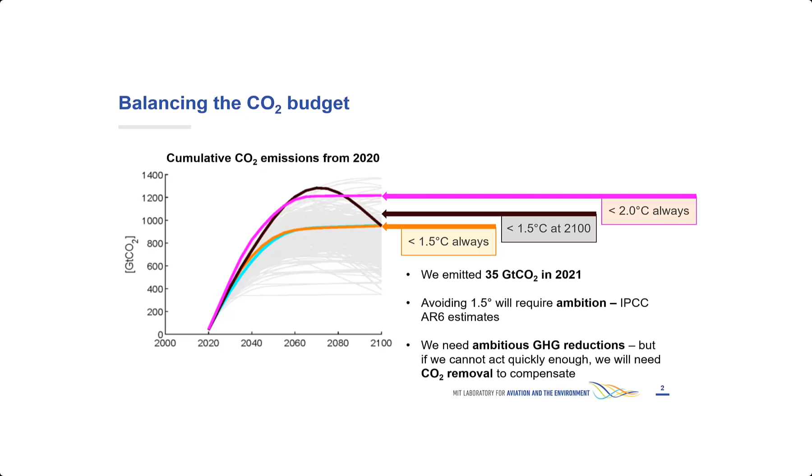And you can see there, an orange line to stay less than 1.5 degrees. It's an aggressive reduction target. You can see there a total plateau by 2060. You can see if we don't achieve that and continue to emit, you can see a line there for staying below 2 degrees. But if we sort of fail to meet the trajectory for the orange line, but still want to maintain 1.5 degrees, you can see another line there, the black line, which implies negative emissions in the latter part of the century. So one of the use cases of direct air capture is not destroying the planet and keeping us at some temperature threshold.

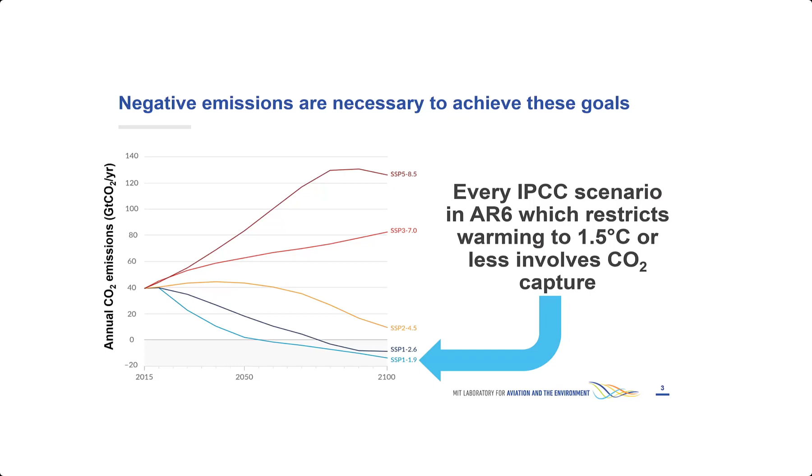Indeed, if you look at the IPCC AR6 scenarios, all the scenarios that keep us below 1.5 degrees involve CO2 capture in some sense, and those are the ones shown in the bottom there. So it really does seem that direct air capture or other negative emissions technologies are central to the future of a sustainable planet at the levels agreed by the global scientific community of 1.5 degrees or less. So that suggests that this is a profoundly important thing we need to work out.

Well, what is direct air capture? Well, I'll leave it to the two domain experts to describe in more detail in subsequent talks. But the idea is we take a stream of air from the atmosphere, treat it in some way which will be discussed, such that the stream of air going back to the atmosphere has less CO2 in it, and the CO2 has been removed, and then something is done with that, and that's the question, what's done with it?

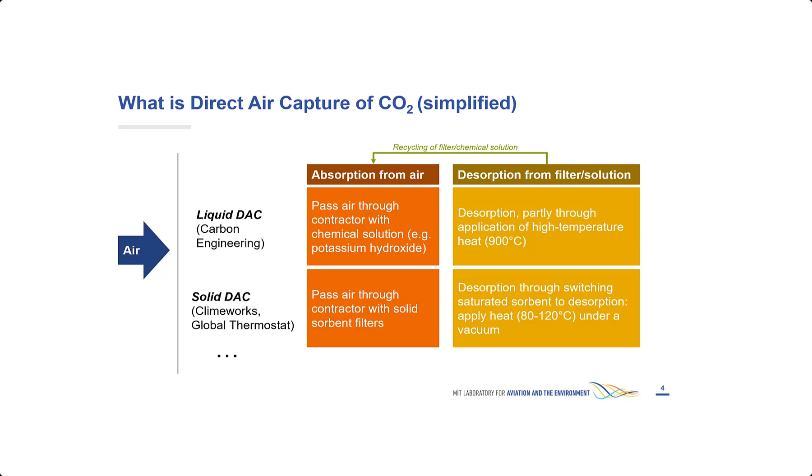So there are two things you could choose to do with that stream of CO2 that you remove from the atmosphere. First, as I alluded to earlier, treat it as a negative emissions technology. In other words, take the CO2 from the atmosphere through direct air capture and put it into long-term storage. An alternative to that, which I'll come back to as to why that is important, particularly when you're in an aerospace engineering department, and it's important to me, is direct air capture as a source of non-fossil carbon for future fuels. So let's start with the first case then, direct air capture and carbon capture and storage as a negative emissions technology.

Well, in order to evaluate what makes this cost competitive or cost effective, we need to look at the competing technologies and the counterfactual. So, what else could you do for negative emissions? And what if you just did nothing and accepted the cost? So let's take the first comparison point, the social cost of carbon. This is the damage to the world done by each ton of CO2 that is emitted. And there's a wide range of estimates of that. As you'd imagine, it's a hard thing to work out. This estimate here comes from a model from my group here in the department, led by Florian Allroggen, and Carla Grobler has done a lot of work on this. But it's consistent with the spread of literature results that are out there and draws on the overall literature to be a consensus estimate.

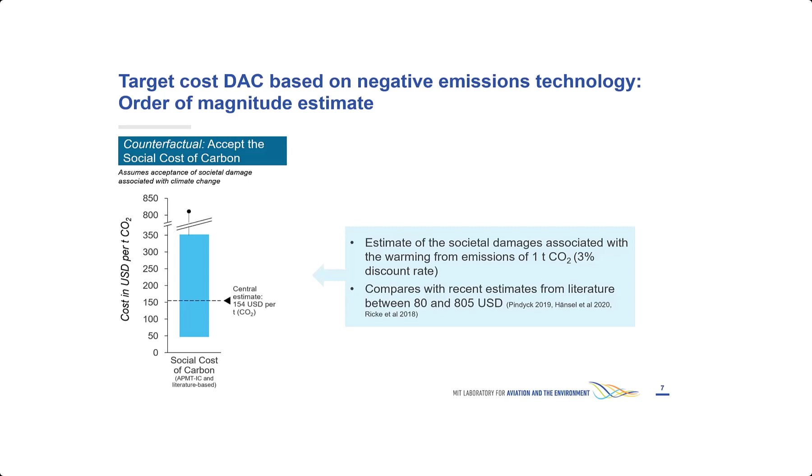So this gives an estimate that a ton of CO2 today causes around $150 of damage to the global economy and environment. Now you can see there a big range. That blue bar is sort of the main uncertainty range. Lots of uncertainties, very hard to estimate. These numbers will never get perfect, so to some extent we just have to live with them, and they'll give us some sense that clearly we should spend more than $10 to abate a ton of CO2, but we probably shouldn't spend more than $1,000 at this point because there'd be better ways to use that, even environmentally. So $150, maybe up to $800. Numbers like 350, if you look out a few decades ahead, give you a sense of how much money you should spend to take a ton of CO2 out of the atmosphere and store it.

Another thing you could do there is compare it to the competition. So the competition, perhaps in the nearer term, to direct air capture would be BECCS. So this is bioenergy with carbon capture and storage. The idea here is that you grow some biomass, switchgrass or some crops, or there's large debate as to what you might use. Through growing the biomass, carbon dioxide is taken out of the air through photosynthesis. It becomes part of the biomass. You then burn the biomass. In so burning it, you generate heat. You use the heat to generate electricity.

Now I should say BECCS does have some fundamental limits that direct air capture probably doesn't have. So even if BECCS is optimal in some sense nearer term, you probably would still end up looking to direct air capture beyond that.

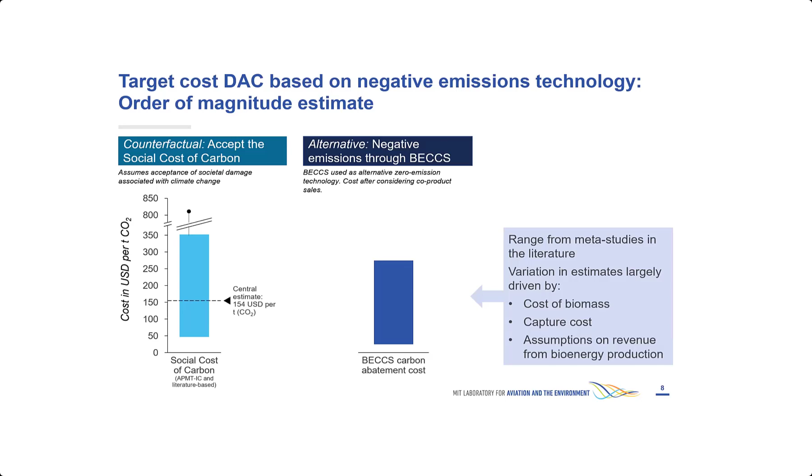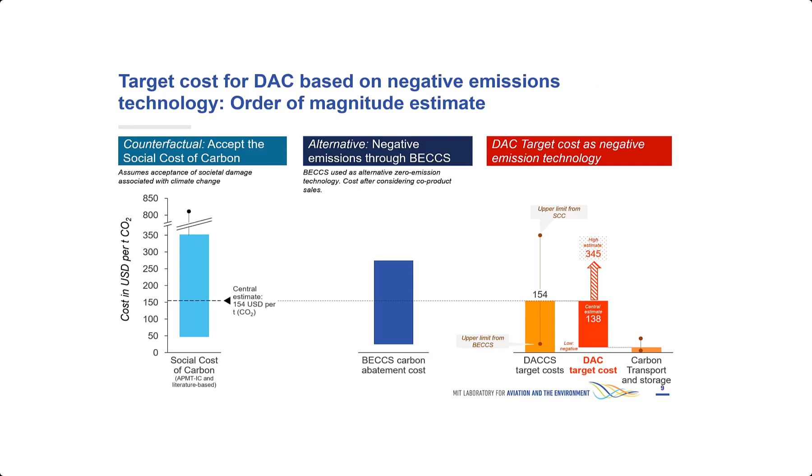So just to make that more concrete, what does that end up as the direct air capture cost? Well, taking the average of the social cost of carbon, you end up at about $138 when you take out the cost of carbon transport and storage. So that just gives you a point number. Again, lots of uncertainty. If it's $350, that still would be useful, but it shouldn't be $1,000.

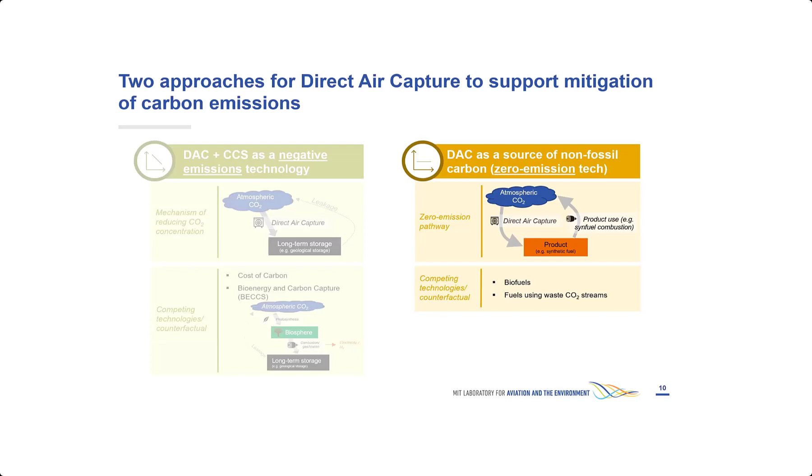So the second use then is not direct air capture as a negative emissions technology, but direct air capture as a source of carbon. So why would that make sense? Well, some of us noticed we're in an aerospace engineering department. No digs intended, of course.

Now, going from that bioenergy potential to jet fuel, you lose a factor of 2 in the conversion efficiency. So let's say we take the number 50 for sake of argument, divide that by 2, then you're at 25. And so you can see that aviation alone, let alone all of the other uses of biomass and bioenergy in mid-century, has taken up the entire usable supply to create biofuels for aviation, which most people believe is the future, assuming you don't want to use fossil fuels in mid-century for aviation.

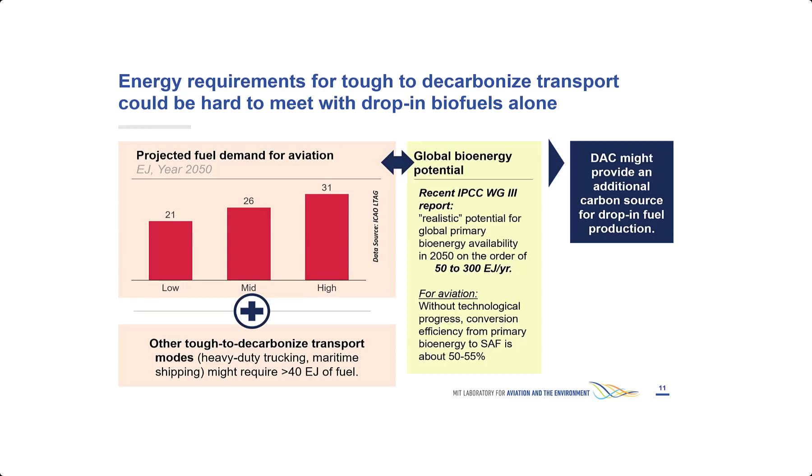So that suggests that at some point, and you could argue as to whether it's 2050 or 2070 or whatever it might be, aviation's demand outgrows the possible supply of biofuels for aviation. And so you need to either use synthetic fuels or hydrogen, essentially. And that's the big question.

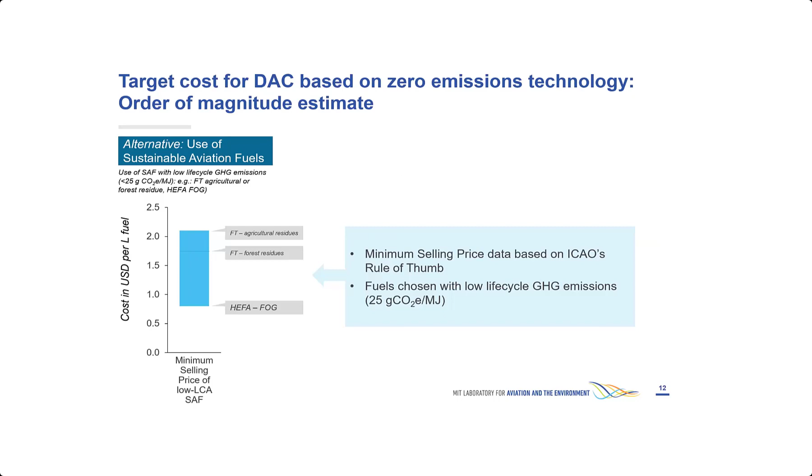So if we take sustainable aviation fuels made from biomass as the competitor for direct air capture, this is the range of prices of sustainable aviation fuels that are low carbon, $1–2 per liter. If we were to use electricity to both run direct air capture to get carbon out of the atmosphere, to make hydrogen, and then to combine that into a hydrocarbon synthetic fuel to put in the aircraft, then this is our estimated cost, about $2.1 per liter.

That then leaves you around $80 per ton for the direct air capture if it was cost competitive with the biofuels. So that does probably tell you that we should use the biofuels first, but at some point that will run out, and then we need direct air capture and power to liquid for the aircraft. Either that, or we reinvent the entire aerospace system to use hydrogen and deal with all the risks and challenges that entails.

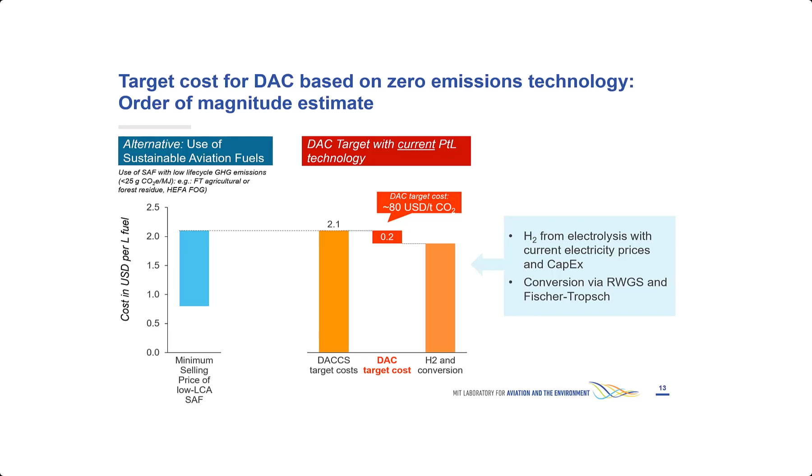So there are obviously many uncertainties in this. Another one could be, what if power to liquid technology advances significantly? Then you do end up with slightly better numbers. $110 per ton could be used for the direct air capture, and that looks a little better compared to estimates of the costs.

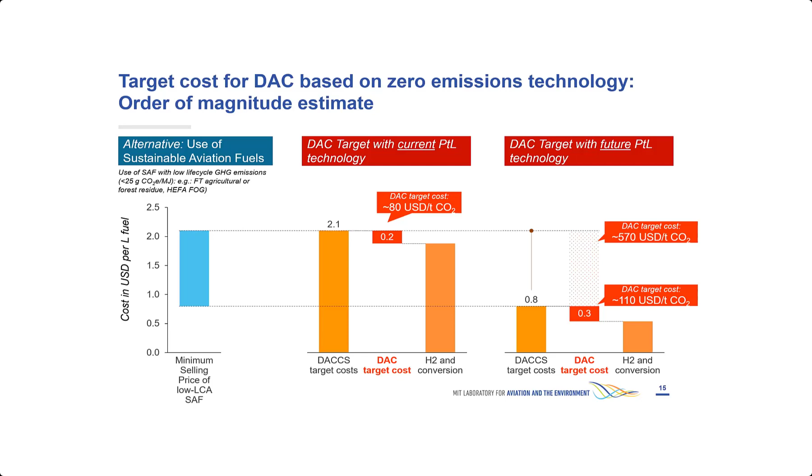So to summarize then, we need the innovators represented here to create for the world direct air capture that's $100 to $300 per ton of carbon. If it sustains at a high number, $500, $600, $700, it probably doesn't help the future of the world. But if it's numbers on the lower end, then we really have a viable solution to not only have a negative emissions technology that makes sense, but also potentially create a long-term future for hydrocarbon fueled aviation, not to say there isn't an alternative there.

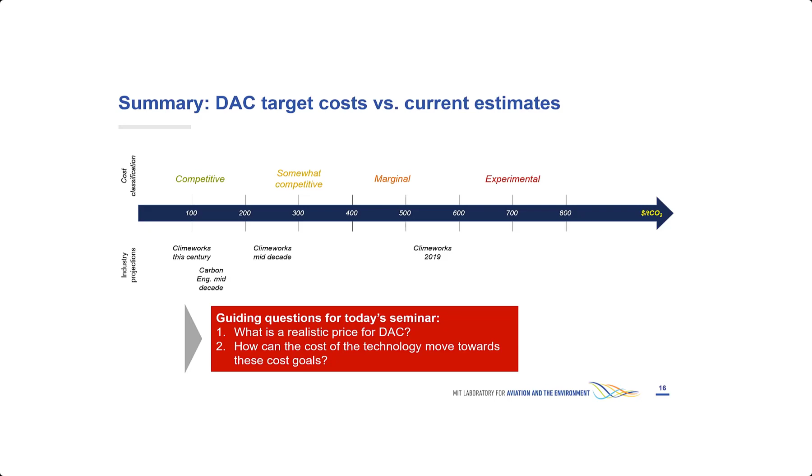I want to talk to you today about a process engineer's view of direct air capture. Before I came back to MIT 30 some odd years ago, I spent 10 years in industry, basically doing chemical process engineering.

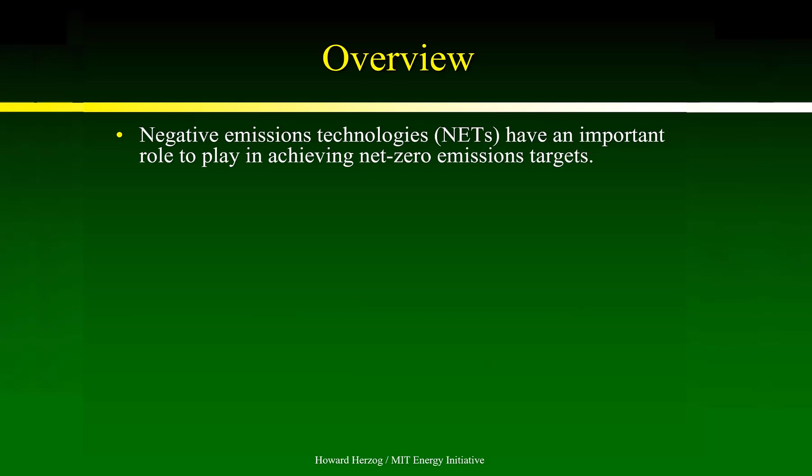So I'll use some of my skills to analyze this. First, let me say a few words about negative emissions in general. I think they have a very important role to play in achieving our net zero emissions target. But when it comes to going net negative, which a lot of people are talking about today, I think that's premature to talk about, and actually a very big distraction from where we are today.

I say that because in order for us to get to net negative, we first have to get to net zero. And so there's a lot of reasons we want these negative emissions to get to net zero without having to complicate it with this net negative. And decades from now, when we're approaching net zero, however many decades that is, we'll have much more information to make informed decisions about whether we continue on past net zero into net negative.

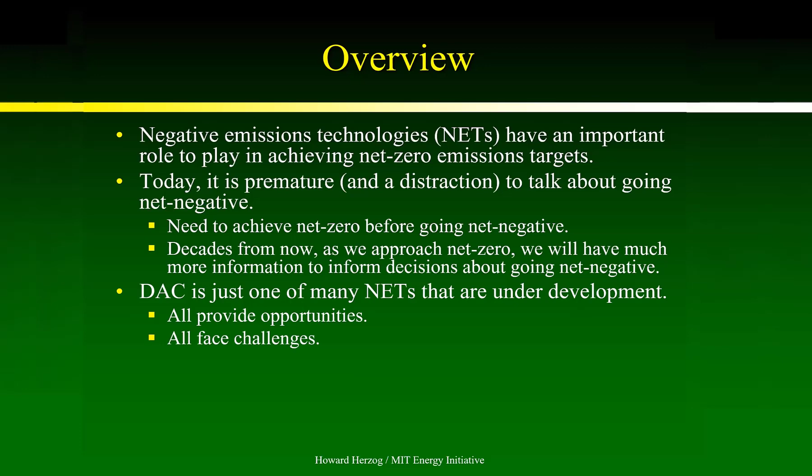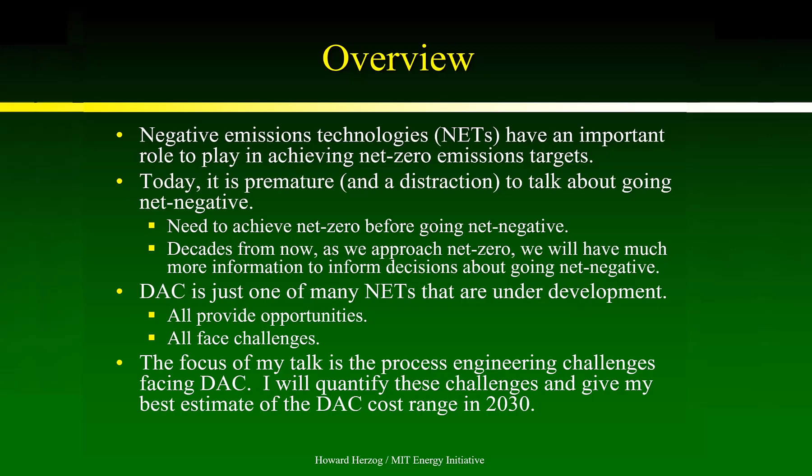As Steven said, direct air capture is just one of many negative emissions technologies that are under development. All these have opportunities, and all of them face challenges. The focus of my talk today is going to be the process engineering challenges faced by direct air capture. And in this talk, I'm going to quantify some of these challenges. And then since everybody's interested in numbers, I'm going to give my cost range for what I see for direct air capture in 2030.

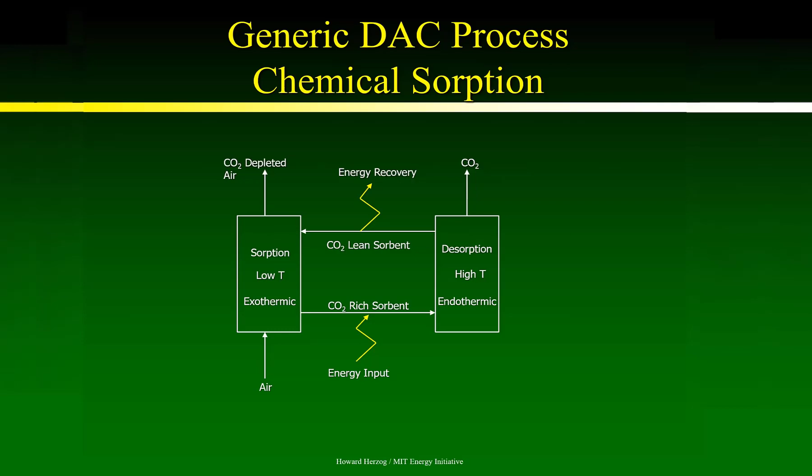So this is what a generic direct air capture process looks like. Basically, it's based on sorption and desorption. You have sorption at low temperatures, which is exothermic, and then at high temperatures you have desorption, which is endothermic, where you regenerate your solvent for reuse and then free up your CO2. You need energy input. You can have some energy recovery in here, and generically, this is how the systems work.

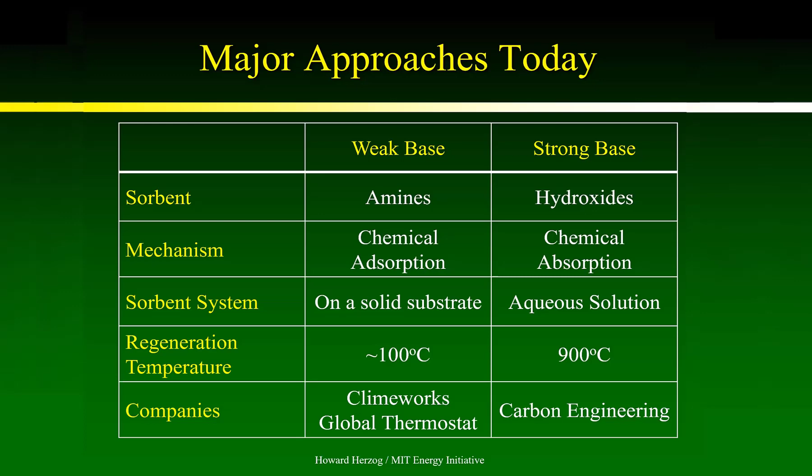Steven mentioned the systems. A lot of people are calling these solid systems and liquid systems. As someone working in the carbon capture business, I like to call it a weak base system and a strong base, being the characterization of the solvents, and the weak base systems use amines. For direct air capture, these amines are impregnated on a solid substrate, and it's an adsorption mechanism. For the strong base systems, you use hydroxides, and this is a chemical absorption system using an aqueous solution. You see a big difference in regeneration temperatures for these systems here.

So the leading processes for direct air capture, just like with regular carbon capture and storage, are based on sorption and desorption. There's one big difference that just drives everything, and that's the concentration of CO2 in the gaseous stream that you're trying to capture it from. In air, that's 0.04%, and that's about 300 times more dilute than you see in a coal gas flue, about 100 times more dilute than in a natural gas flue. And this has big consequences.

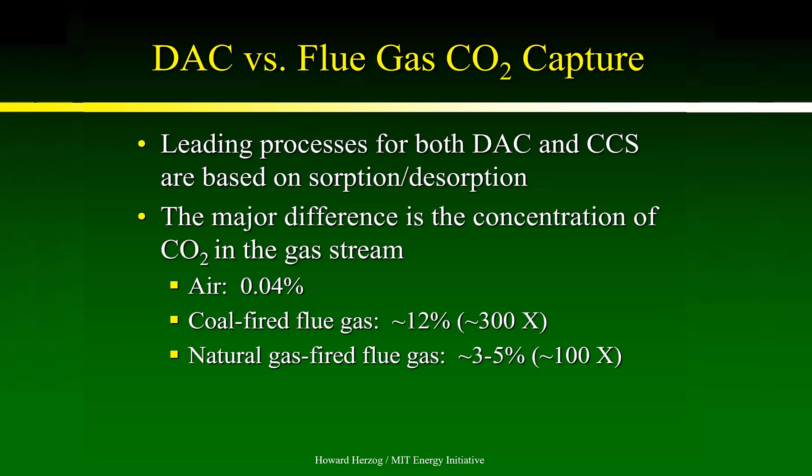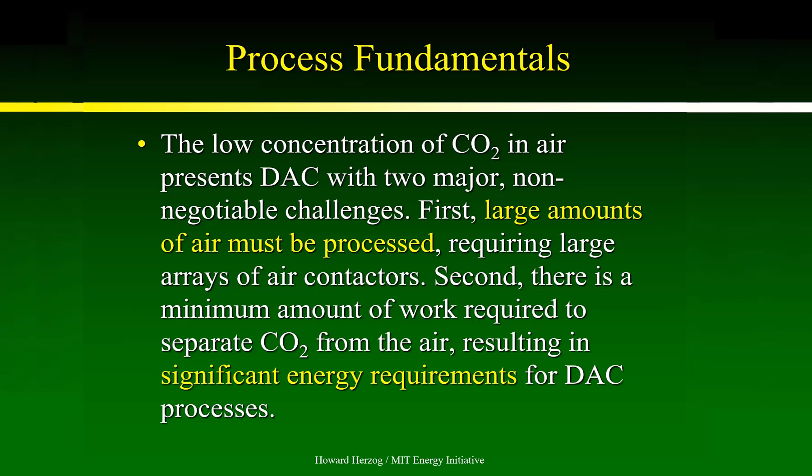Two of the major consequences we see are, first, you need large amounts of air to be processed if you're going to capture a ton of CO2. We can calculate that exactly, and in just a moment I will. Secondly, there's going to be a fairly significant work requirement. There's a minimum work requirement, and we're going to need multiple times the minimum work in real processes, and this leads to significant energy requirements. So once again, I'll quantify that. As I say in the first sentence here, these are two major, non-negotiable challenges. So let's take a look at air processing.

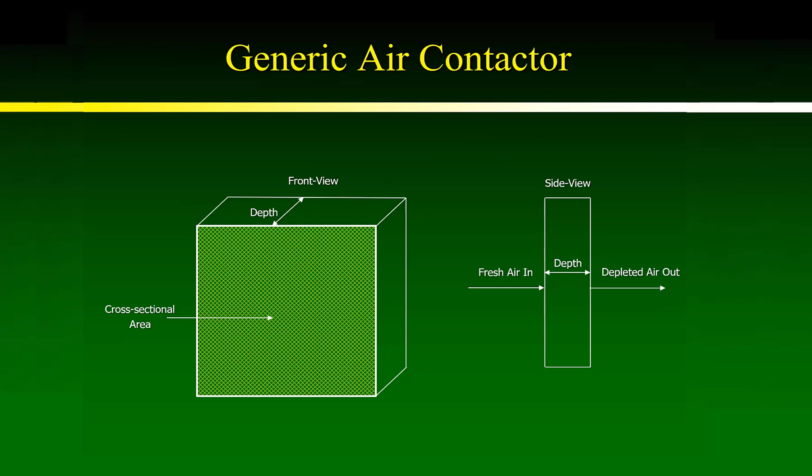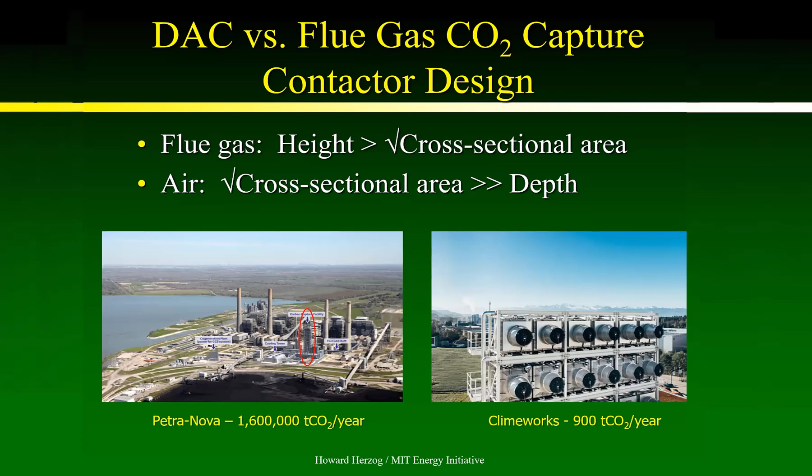We can quantify exactly what the cross-sectional area you need. In this example, we're taking the concentration of CO2 in the air as 410 ppm. We're going to capture 1 million tons of CO2 per year, and we'll assume the utilization rate of our capture plant is 90%.

You have two other variables: the linear velocity, which is how fast the air is flowing through the contactor. For absorbers in general, it's in the range of 1 to 5 meters per second. And you also need how much of the CO2 you capture from any given volume of air. I show it for several values, from 50% to 90%.

The carbon engineering design, which was discussed in the Joule journal from Carbon Engineering, had a linear velocity of 1.4 meters per second and a capture fraction of about 75%. That gives us a cross-sectional area of 46,000 square meters.

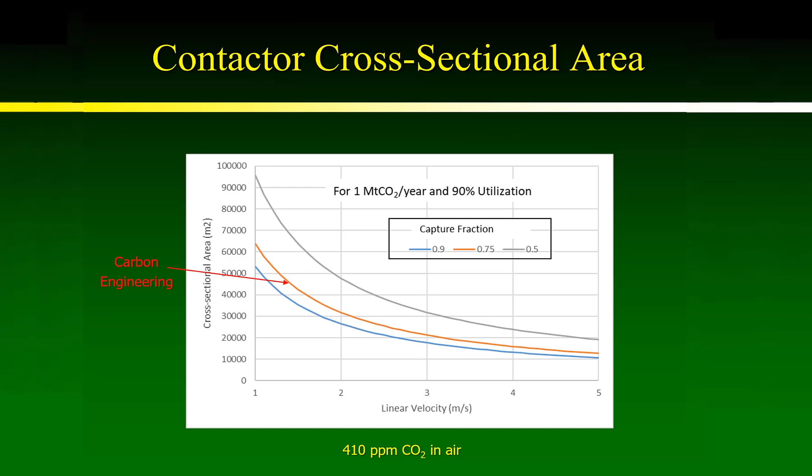Well, what's 46,000 square meters? Let's put that in perspective. It's basically, if you had a structure 10 meters tall, it would be almost 3 miles long. So 10 meters tall, about a 3-story building, 3 miles long. So this is very large.

You'll break it down and use multiple contactors. And one thing you have to do now is space the contactors. I say this is analogous to a wind farm. When you build windmills, you don't want it in the wind shadow of another windmill, so you have to space them out. Here, you don't want one contactor sucking in the depleted air from another one.

And you need to know this number to understand the land areas. Unfortunately, in the literature, I haven't seen any detailed study. You go into the literature and see lots of studies on wind, on how you do the spacing, but I haven't seen that at all for direct air capture. There was a National Academy study that gave a range of 1 to 7 kilometers squared for 1 million tons. But once again, I haven't seen anything based on what I'd say you need—some sort of atmospheric dispersion modeling to do that. Maybe David in the next talk may address this issue a little.

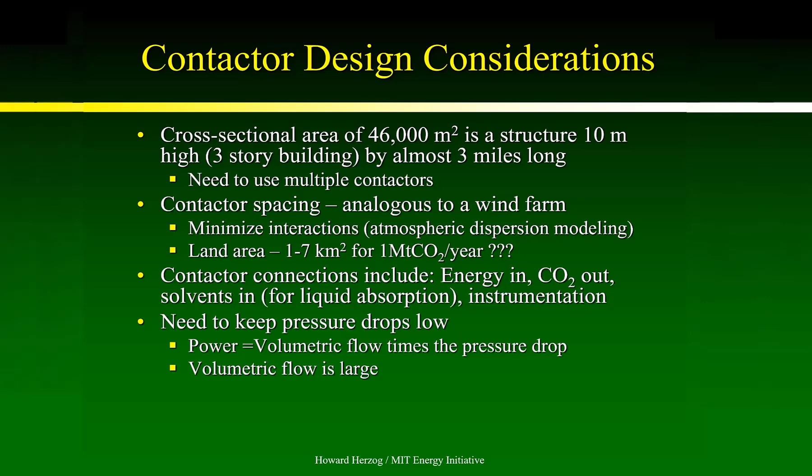You also need to connect these contactors. You need to put energy into them, and take CO2 out of them. For the liquid absorption systems, you need to put solvents in. You have to have instrumentation. And the other thing you need to do is keep the pressure drop very, very low. You're putting a lot of air through here, and the power to do that is proportional to the volumetric flow times the pressure drop. So a small change in pressure drop can give you a big change in the power needed to move that air. These are the requirements of the contactor.

Now let's look at energy. If you go into the literature—and actually it's based on a little more than literature, these are some numbers from the Climeworks unit, but it's also fairly consistent with other capture processes out there—you need about 1,200 kilowatt hours per ton of CO2. Sometimes these numbers don't include compression, but I've adjusted everything because you really need to compress the CO2 coming out of these units.

Climeworks has one going to a greenhouse. You don't have to compress there, but if you want to do it for storage or for other reasons, you are going to have to compress.

To keep the cost of these negative emissions from becoming excessive, you have to use a very low or zero carbon source of energy. As an example, if I'm next to a coal-fired power plant and using the electricity from that plant to power my direct air capture unit, I'm going to generate 1.2 tons of CO2 for every ton of CO2 I take out of the air. Obviously, that's a non-starter.

I should have said something else at the beginning here—I've done this all on a power basis. Some systems use other energy sources too, including both power and heat. Climeworks, for instance, uses both power and heat, but they also talk about using all power and using a heat pump to generate the heat they need from the electricity. So things can change, but for illustrative purposes, to show the magnitude of the energy we're going to need, we go through this exercise.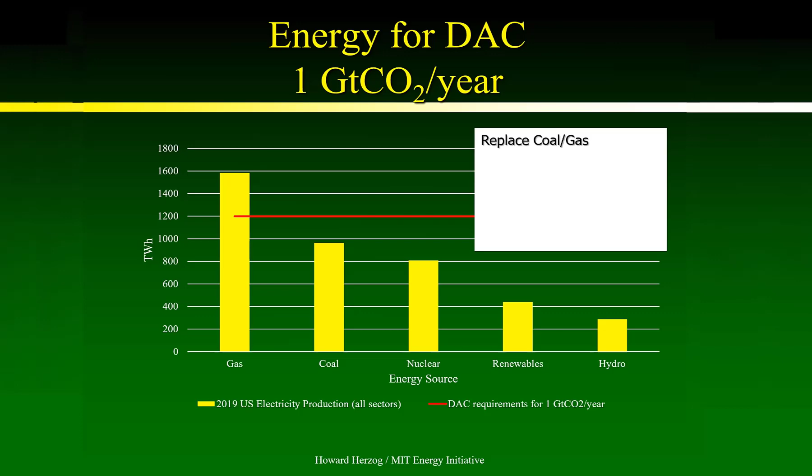So it's a lot of energy to do this, but at the same time, we want more carbon-free energy because we want to get rid of our coal and gas on this graph. Nuclear plants are going to be retiring, and we want to replace those with carbon-free energy. We need to increase our electricity to charge our electric vehicles, power our heat pumps, and there's a big movement in green hydrogen these days, so we need electricity for our electrolyzers. And of course, we want some power for direct air capture. So this scale is monumental. You hear a number like 1,200 kilowatt-hours per ton, but when you start looking at it this way, you really start seeing the scale of the problem.

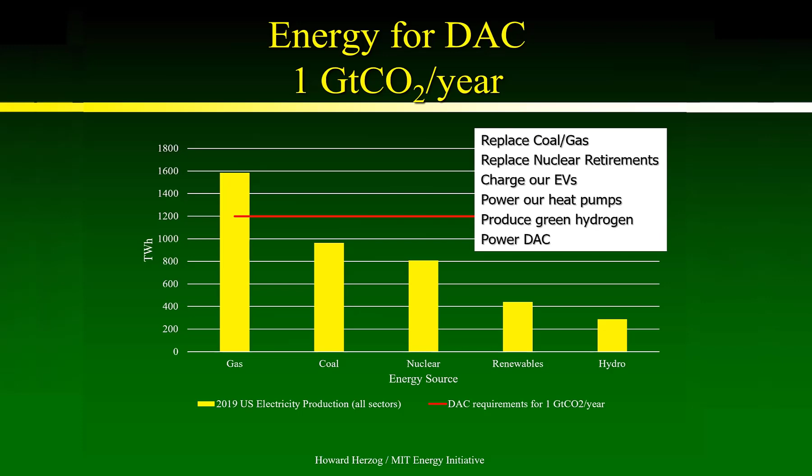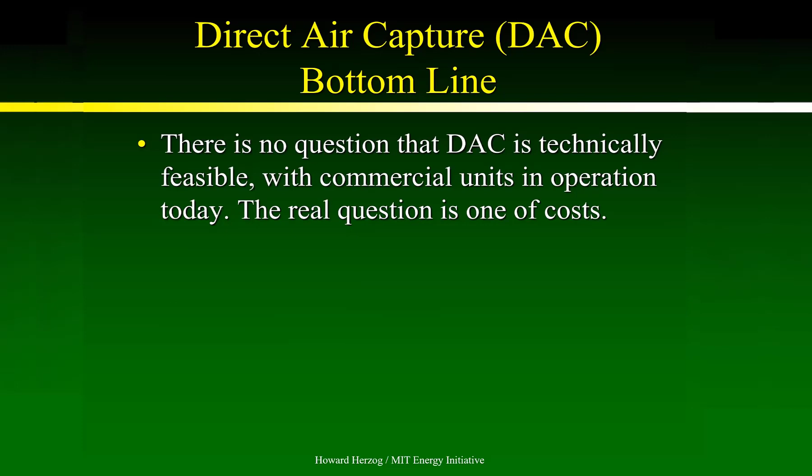All right, let's come to cost. Just to be clear, as I said before, there's no question we can technically do it because there are commercial units operating today. The real question is one of cost. Oops, let me go back.

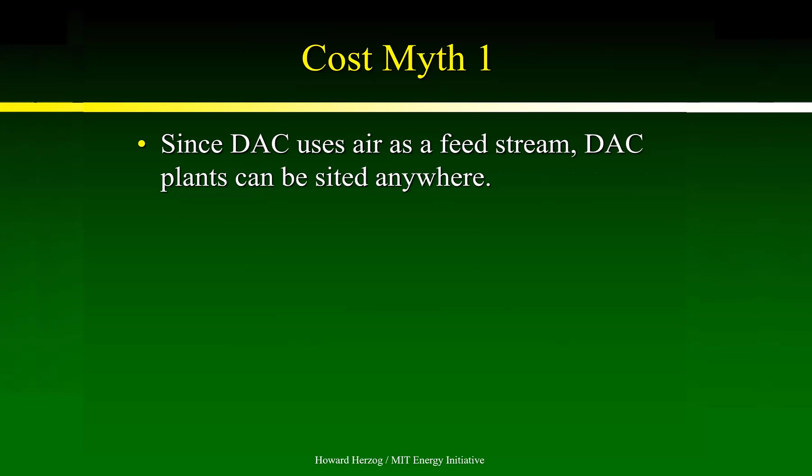Before I do that, I want to talk about, when you read the literature, there's a lot of what I call cost myths out there. People say this is great because these things are going to reduce cost. Well, the first thing is people say, because we use air as a feed stream, we can put a DAC plant anywhere. Well, siting is a very complex problem. Items like land availability, access to low carbon energy and other utilities like water, permitting issues, acceptable meteorological conditions.

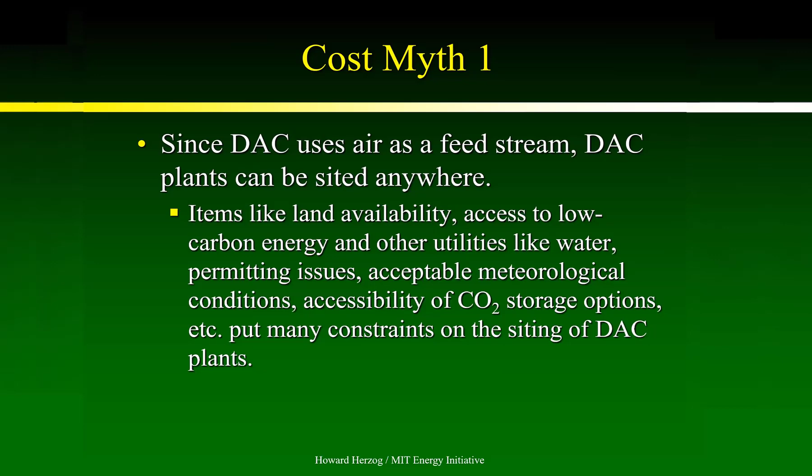And a lot of these processes, the ambient meteorological conditions affect it. I just saw an article the other day that Climeworks, in their new process up in Iceland, had trouble when the weather got cold, and they actually had to shut down and make some modifications. All of these can be handled, but it just adds money. Accessibility of CO2 storage options all put constraints on the siting of DAC. So siting of DAC units, especially at large scale, is not going to be simple.

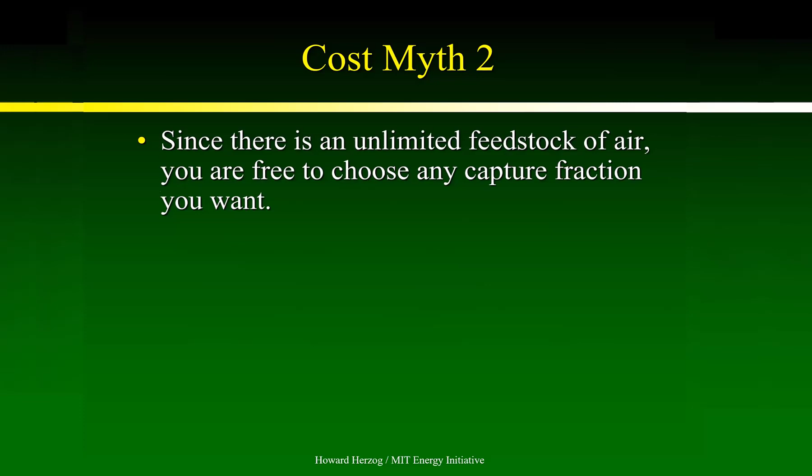There's another cost myth: there's unlimited feedstock of air, so we're free to choose the capture fraction we want. As a process engineer, this is the one that drove me crazy, more than any of them. The optimal capture fraction is really a dependent variable in the design, not an independent one. It comes from trade-offs and other things.

So if we go to a higher capture fraction, that will decrease the amount of air processed and decrease the cross-sectional area, but it will increase the contactor depth and the pressure drop. So when you do the engineering, there becomes a sweet spot. Looking through the literature from Climeworks and Carbon Engineering, it looks like that sweet spot is in the 60 to 75, 80% range. Now, that could change with other designs, but that's what I'm seeing so far from the literature.

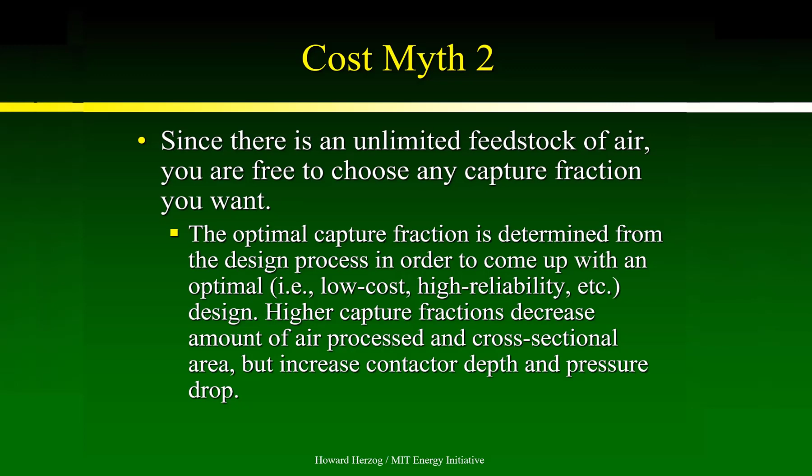People say, well, if we're using thermal energy for regeneration at 100 degrees C, that can be supplied by waste heat. This is the approach for companies like Climeworks or Global Thermostat. But we can have a discussion whether 100 degrees C is really waste heat or not. In any case, there may be some opportunities to take advantage of excess thermal energy, but when you start doing this on a gigaton scale, which people want to do, those opportunities are going to be a very small fraction.

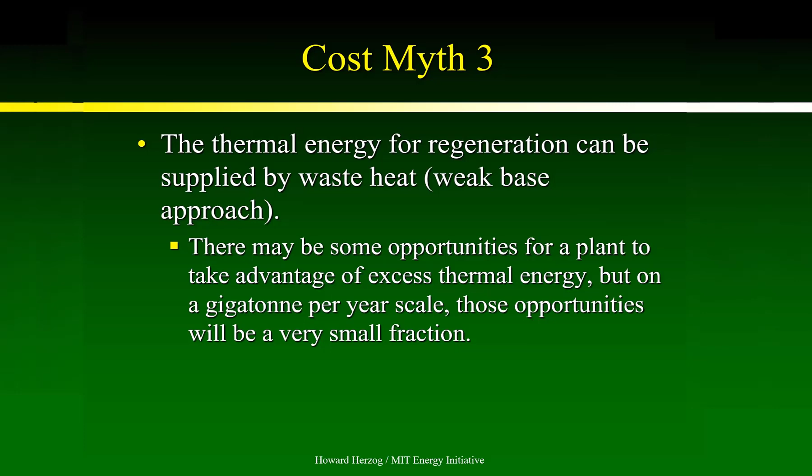So now, what's the cost? And I saw, Steven, you had $375 as your high estimate. You're going to have to revise your slide, I think.

You can buy negative emissions today from direct air capture. You go to Climeworks' website, and they're selling them for $1,200 a ton of CO2. There are many papers and articles quoting a range of $100 to $300 per ton. I just don't find these estimates credible, for reasons I have here, though I've also had more in-depth analysis I don't have time to talk about now. If you asked me what I thought the cost would be in 2030, I'd guess a range of $600 to $1,000 per ton of CO2 removed, per net ton of CO2 removed. So this is an avoided cost—this is the real number we're looking at.

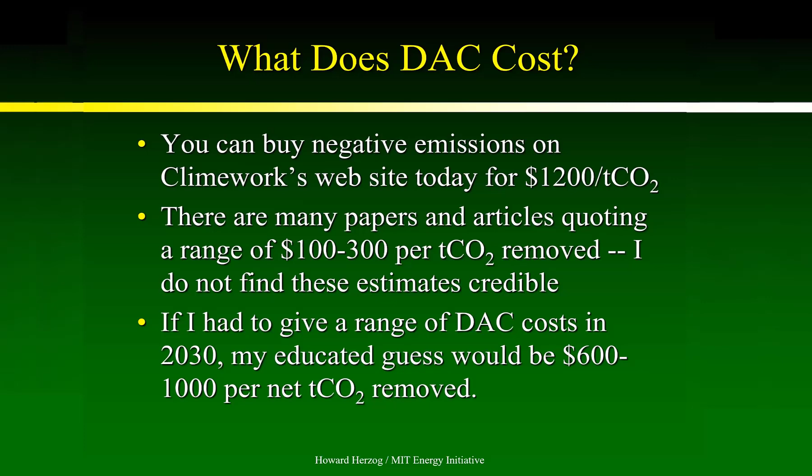I recently wrote a book chapter, and this book on negative emissions is going to be published in August of this year. I'd be happy to send anybody here a copy of that chapter. It has more details on what I've talked about here today. And after that, I'll turn it over to David.

So first of all, thanks to Seb for helping to put this together, to Steve for introducing, and to Jake, and thanks especially to Howie for speaking. I really want to emphasize how important it is in this world, especially in the US, with this ridiculous amount of polarization, to have a respectful, fact-based dialogue—it's really a treat, I think that's the right word. And I expect that to happen here, because I've got huge respect for the work Howard has done. He helped get me started working in CCS towards the end of the last century.

So I guess a preview—an obvious question is, if you want to know about the costs of industrial technologies, should you believe an MIT engineer or a Harvard professor? The obvious answer is going to be the MIT engineer, but I've got a slightly different answer, and it's not the one you'd expect.

Let me get to some things I agree with first. Direct air capture, DAC, is high on a hype cycle right now, no question. You can see that so clearly because direct air capture is becoming synonymous with carbon removal in a way that forgets there is any other carbon removal. No question that's true.